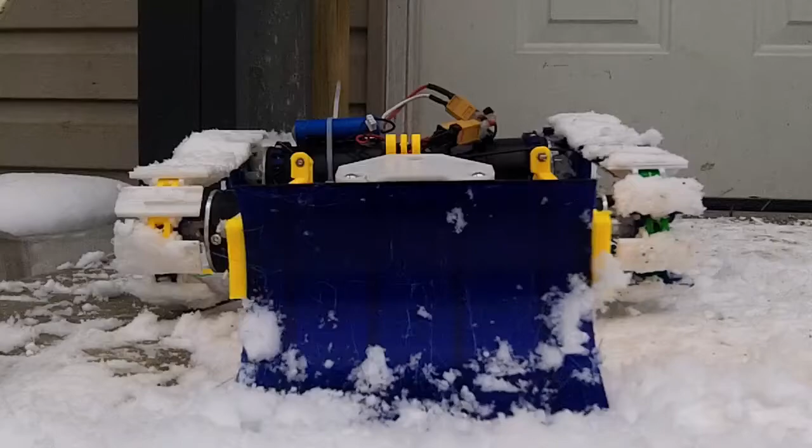Hello everyone and welcome. One of the earlier projects I did on this channel was a 3D printed snowblower. This took a few attempts to get right, but by the end I had something I'd call a working snowblower. If you want to check out the full video, the link's right here.

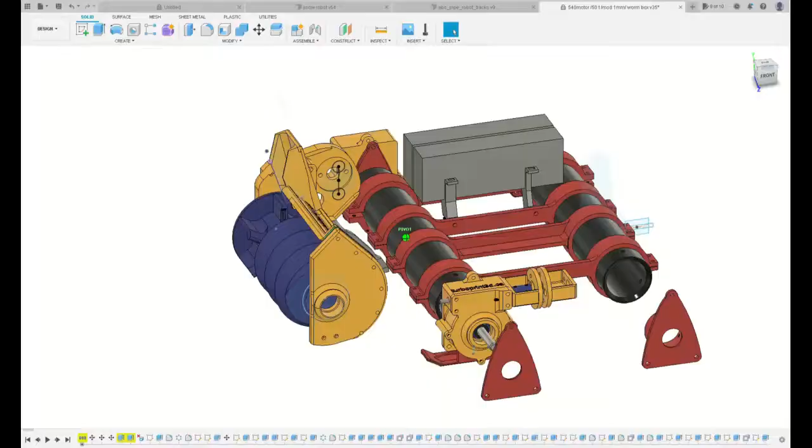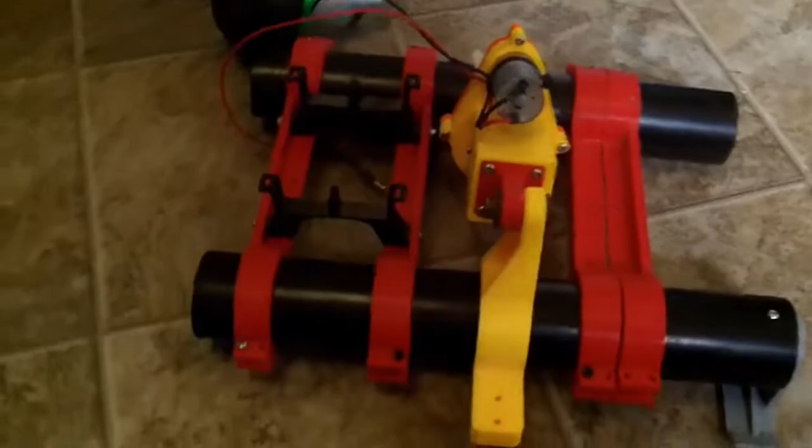By the end of this project, it was clear that the robot platform I built a long time ago was lacking in the ability to support the snowblower. So I intended to make a larger robot that would support the snowblower and maybe other implements I could use throughout the year as a lawn maintenance robot prototype. Since the original video, I started a few different larger platform robots, but never really liked what came of them, so I never put much time and effort into them. Then, in a blink of an eye, we're covered in snow.

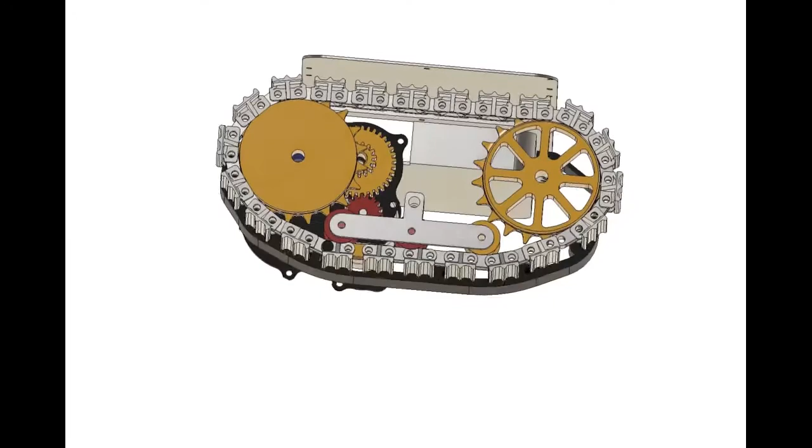With the recent snowfall, I felt inspired to get back at this project and I came up with this. It's not necessarily larger than the original platform, however it's a lot heavier and will be a lot more powerful. I have two 775 brushed motors in there for now, and if it all works out I plan on going brushless in the future. For this robot I've designed a set of completely 3D printed tracks.

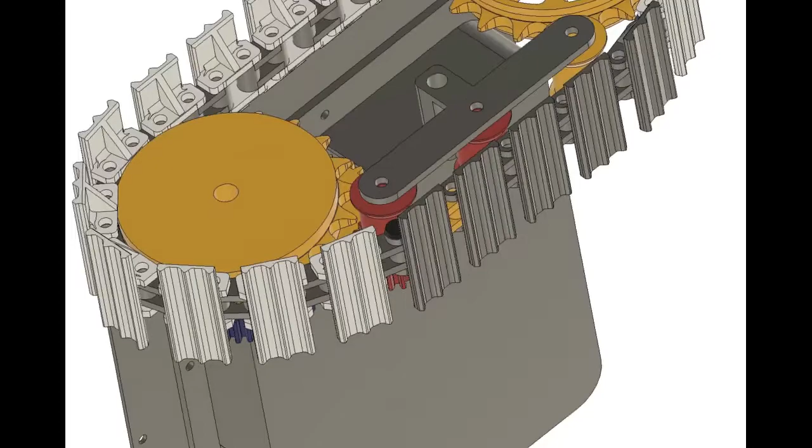These tracks are made up of 3 pieces, stacked as long as I need them to be, and it's all held together with 3D printed pins. This track is driven by a standard half-inch pitch sprocket, or number 40 chain. The idea is if this works out and I want to build a larger platform, I can make all of this out of steel with off-the-shelf parts and some minor modifications.

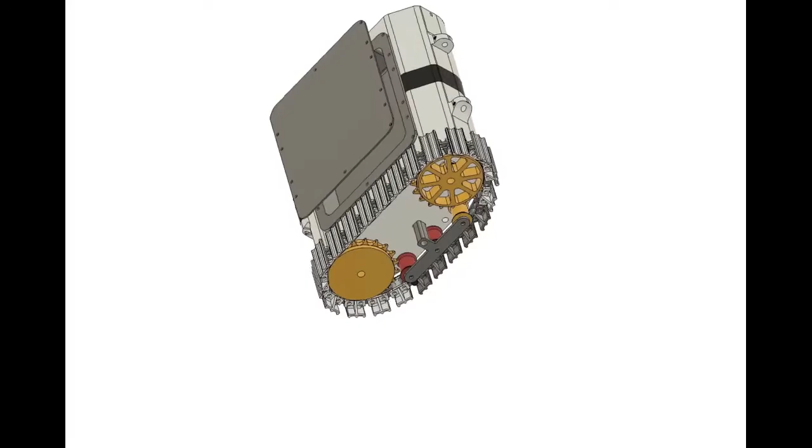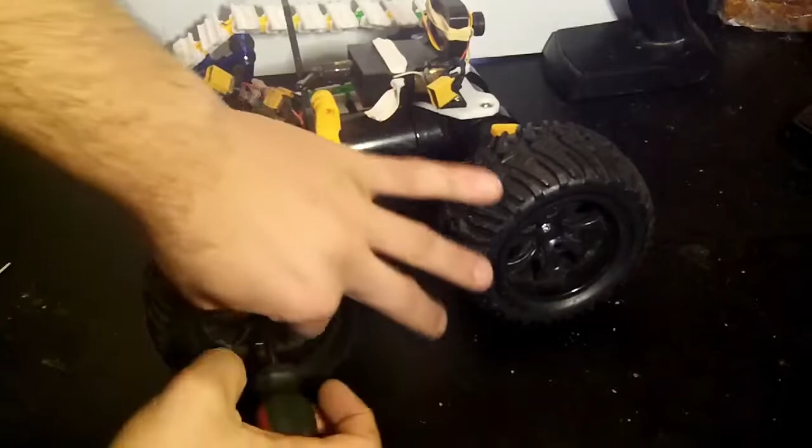The focus of this video was originally going to be the larger 775 powered robot, but that's taking a lot longer than anticipated, so I'm going to give you a snippet of my testing of the tracks for this, which will cost me a little more time, but I wanted to get a video out to you guys. So here we go.

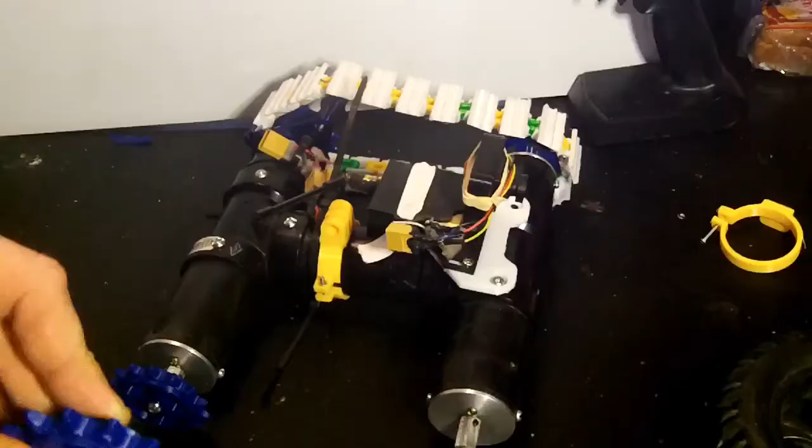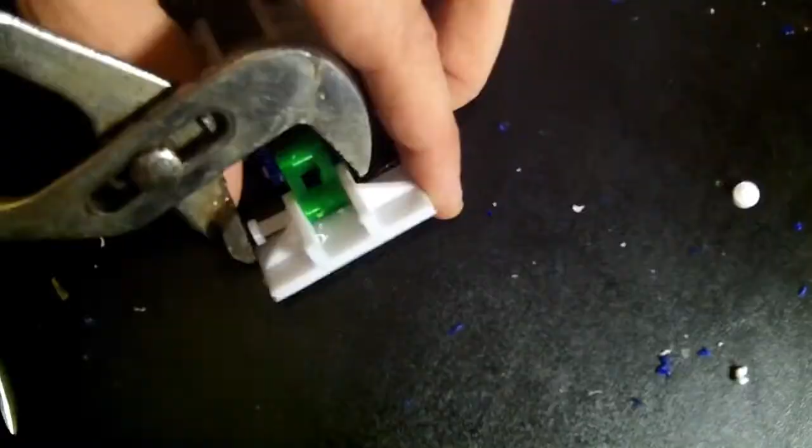And I figured since it needed an upgrade anyways, what better platform than the previous robot. Assembling the tracks is relatively easy, although time consuming. Just these 3 main pieces, and the pins push into the holes and away we go. To note, I did drill out the intermediate links with a 4mm drill just to clear out any hairs or anything in there.

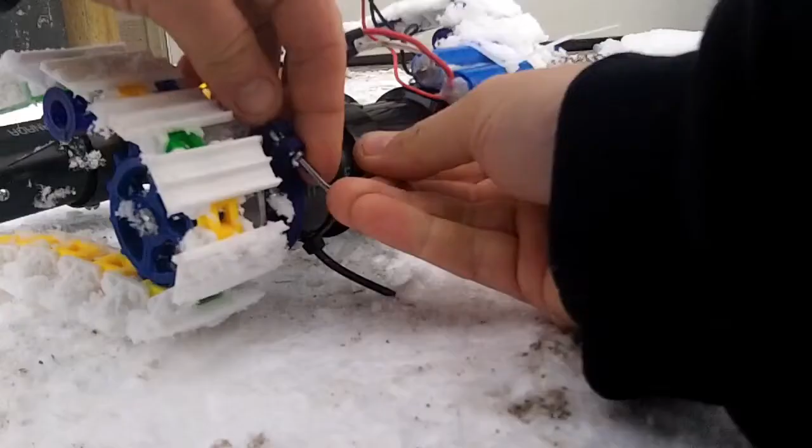Everything's together and I head outside to a decent start. It doesn't fall apart immediately. However, it doesn't take long to see the limitations of this setup, the biggest being ground clearance. It seems to get hung up on the snow a fair amount. I think I can solve this with one quick adjustment on each side - I just got to flip these track adjusters around and it should hold the whole body up.

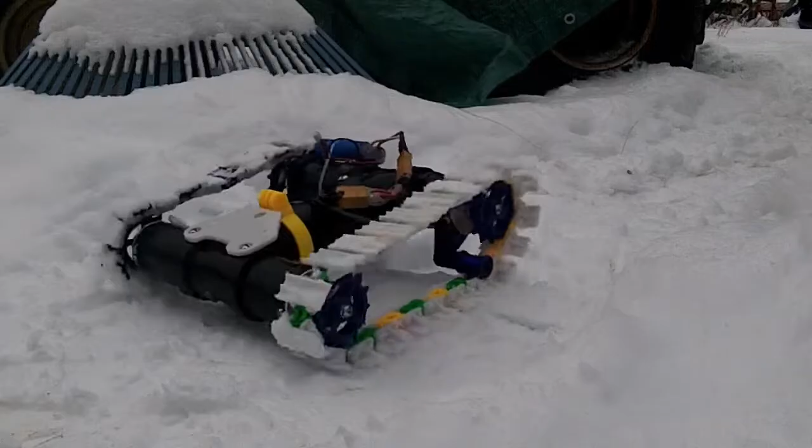Immediately I see an improvement with this. I couldn't make it down this trail at all before, and now it's working fine. I can even dive into the fresh powder where it's not packed down, and it has very little issues up until a point, which isn't too bad considering this isn't really designed for this in the first place.

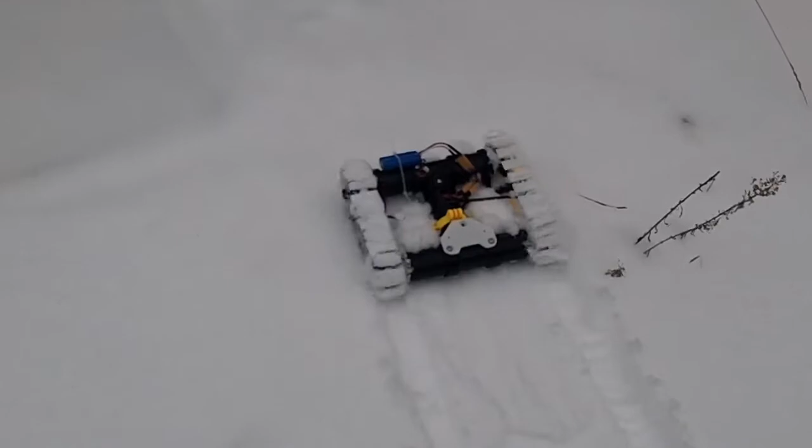I'm going to attempt that little hill I climbed before, and no issues there either. Looks like this is a definite improvement. Well, it looks like I almost get stuck, but then it manages to chew its way out. These tracks seem to offer a decent amount of traction considering they don't have much for paddles on them - they're only about 3mm deep.

After climbing through the snow though, I started to notice it was clicking and clunking a little bit, and it seemed to be riding up on the sprocket. A quick look shows that the snow is packing in, so in future versions I should put holes for cleanouts so the sprocket can push the snow out instead of just packing it in there. Otherwise I might cover the whole chain in paraffin wax.

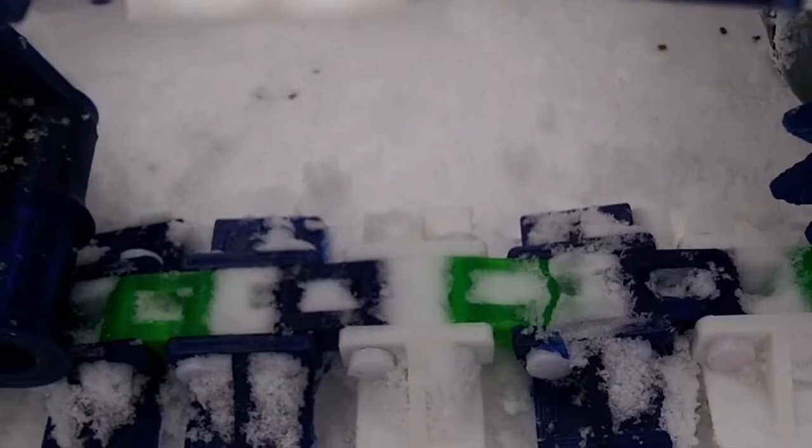After the first run, I decided I was going to put this to work and printed off a little plow for it. I haven't weighed it one way or the other, but I'm pretty sure this weighs a little less than the actual RC car tires did. Although they have increased traction, it doesn't really have the weight to push anything. Doesn't help that it's slightly above freezing and all this snow is wet and packy.

Perfect for snowmen though, or even better, snowball fights. It seems to have decent traction on the hard pack though, you know, in the driveway or on trails where people walk, which is about the intended purpose for these tracks. So I guess that's a win.

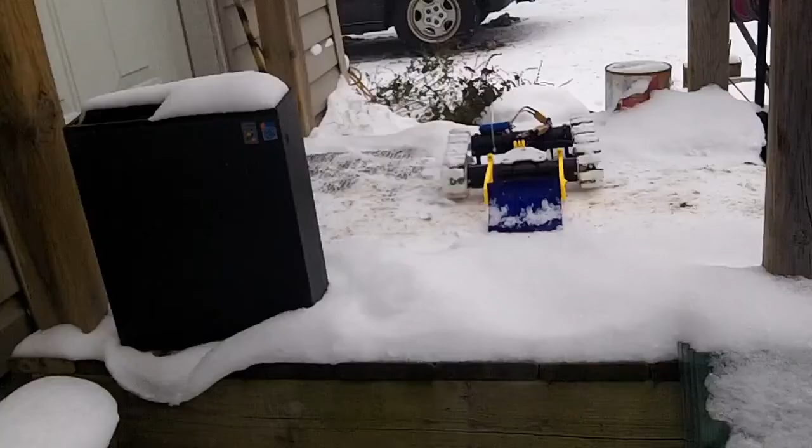And with all that, I think I can call this a partial success at least. We'll find out how well they hold up to a 775 motor. Now if I have too much of an issue, I can always make it a double link and make another sprocket and just double it up on the shaft, make the shaft a little longer, and those bigger motors should have no issue driving a wider track and heavier system anyways.